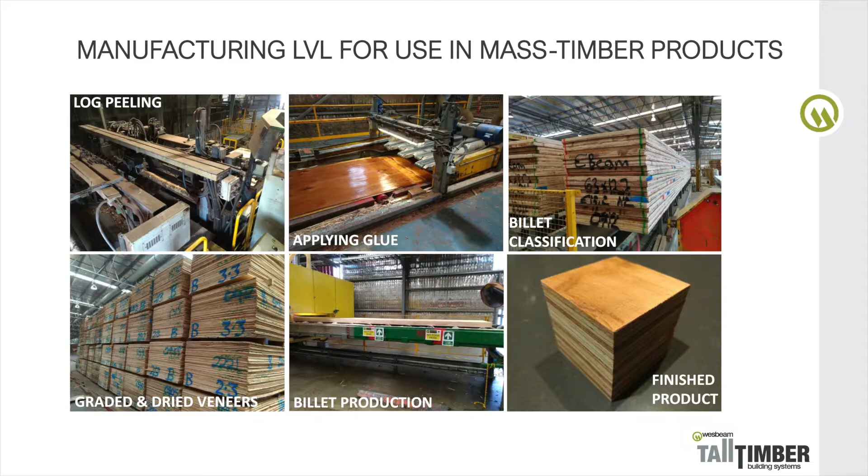So if the design determines that the column needs to be 600 by 400 millimetres, for example, then you can build up layers of LVL. And because it's being made in this plate format, you can then increase some sections of that build up to higher lengths than the other and create the opportunity to have a mortise and tenon, if you like, junction, which allows and speaks to how you can start to connect these buildings. So having the elements is one thing, but having the connections is another.

You can make a mass floor out of LVL, and this is where you block laminate LVL together, and you can in turn also block laminate other materials. And at the moment I'm working with another company here in Australia to look at block laminating CLT and LVL together to get even a longer span than some of the ones that Greg was talking about. And we're talking 9+ metres in a mass floor at the moment.

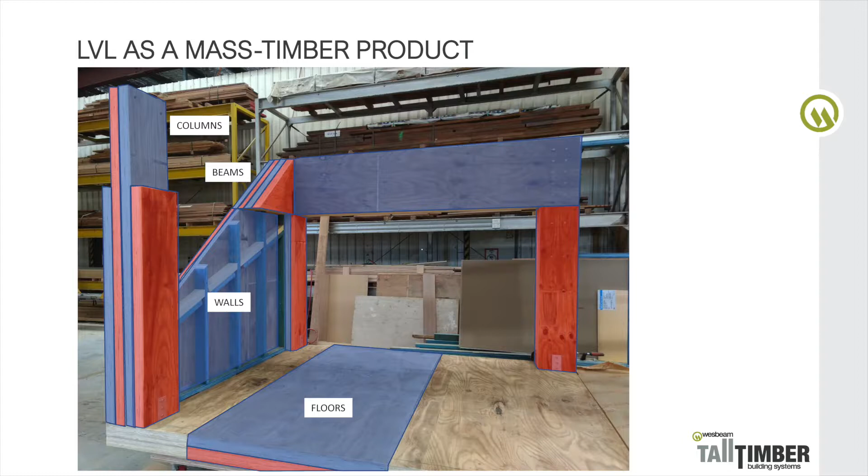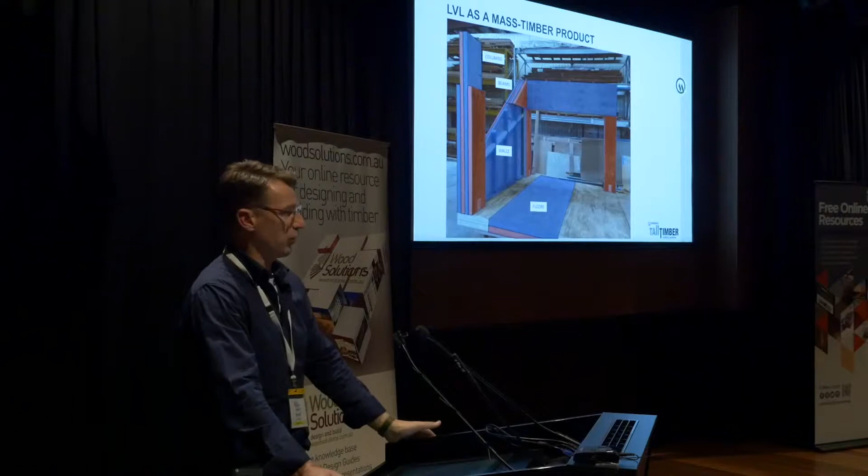And of course you can make a mass wall out of LVL as well if you want to. In this instance, it's actually a hybrid mass and light frame wall, which could be used as a dividing wall for acoustic purposes. But this is a part of the journey that we're on at the moment to start to help educate the market about what's possible to make LVL, in this case, into mass elements.

So, this is the family of elements that I've been developing, if you like, codifying for Wesbeam to share with the industry at large. These elements we don't make, so let's get that out front right now. Wesbeam makes LVL and we bring a lot of smarts to the discussion. These elements are for further up the food chain or up the supply chain, which we like to think that we can partner with and assist with.

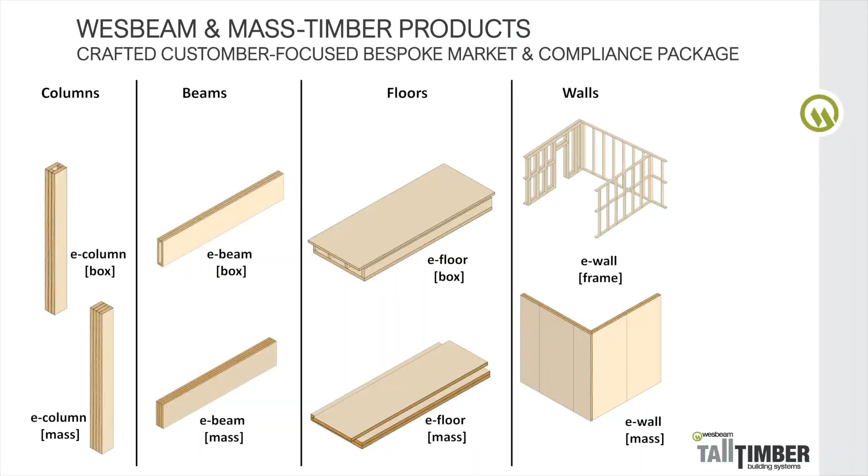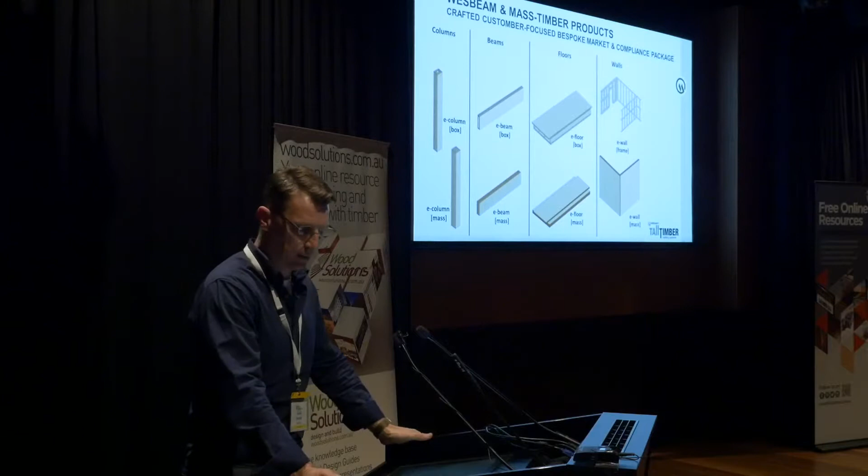So of course we've got all the standard things that we've been hearing about earlier today. Columns, beams, floors and walls. All of them can become mass elements. So let's look through some of the column options. In this case, a box. So this is just a snapshot of a document that we will be releasing later on in the year, talking about typical sizes.

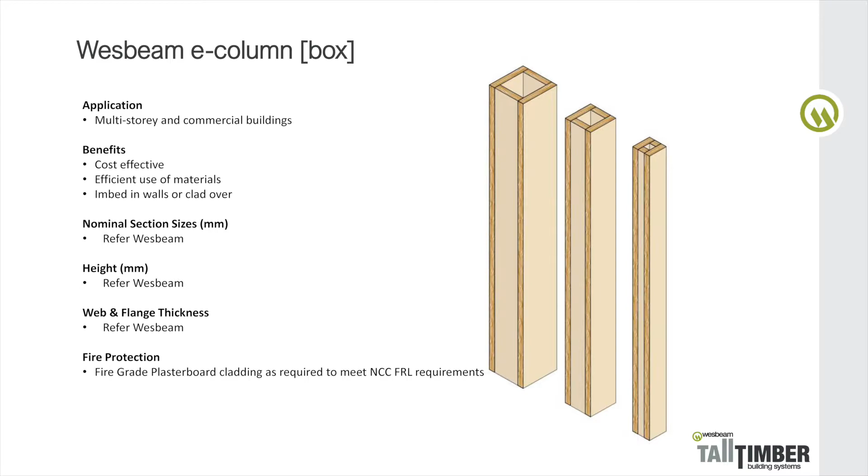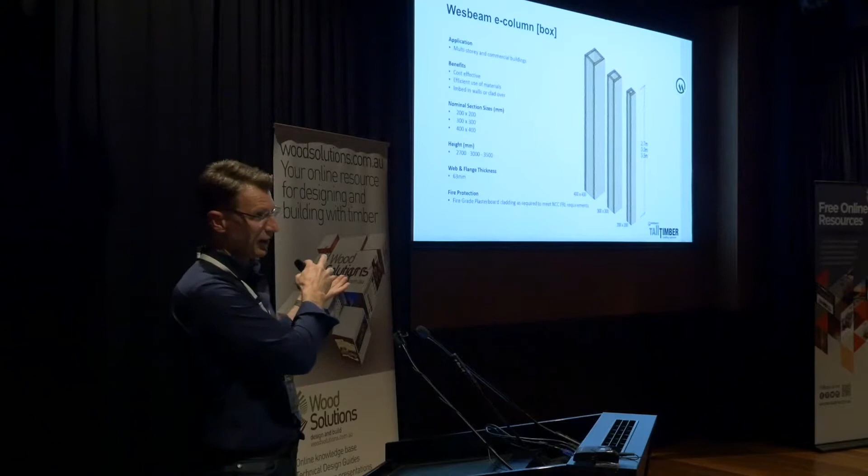Now, I believe that there are two areas that the industry at large needs to be aware of. There's the commodification of standardised formats, and then there is the bespoke elements. Now, the fabricating sector in this country, I think, has got a long journey in front of it, but an incredibly bright journey, because some amazing examples out of Europe are showing us the way. But it's the fabricating sector that's going to start taking products like these and applying them to buildings.

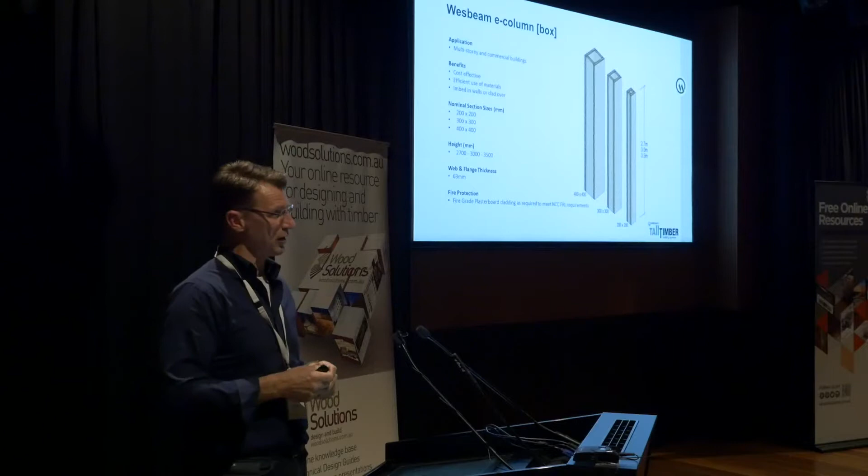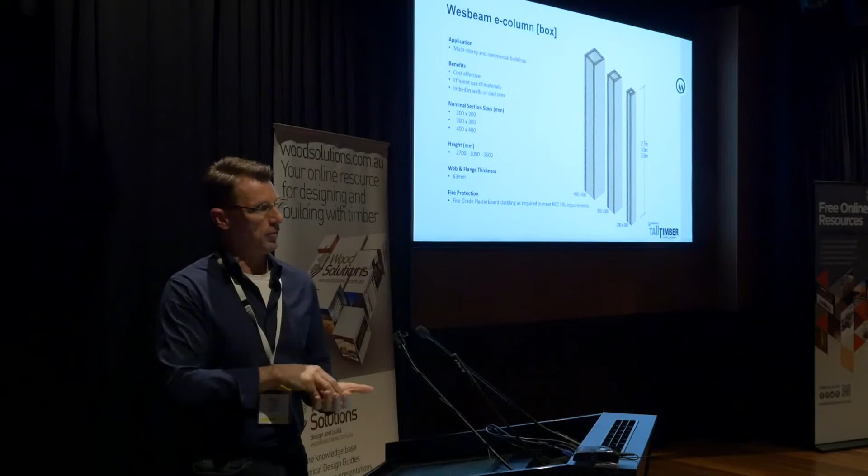Now, I believe if you take a standardised building, say an office building with a 9x9 grid, typically you're going to have pretty common column sizes, pretty common beam sizes. I think every time that somebody wants one of those, they should be able to go to a guidebook or go to the internet, find out who's manufacturing those, what the order of magnitude of cost is, what the performance is going to be, and choose which one of those they're going to select. We shouldn't have to make that from scratch every time.

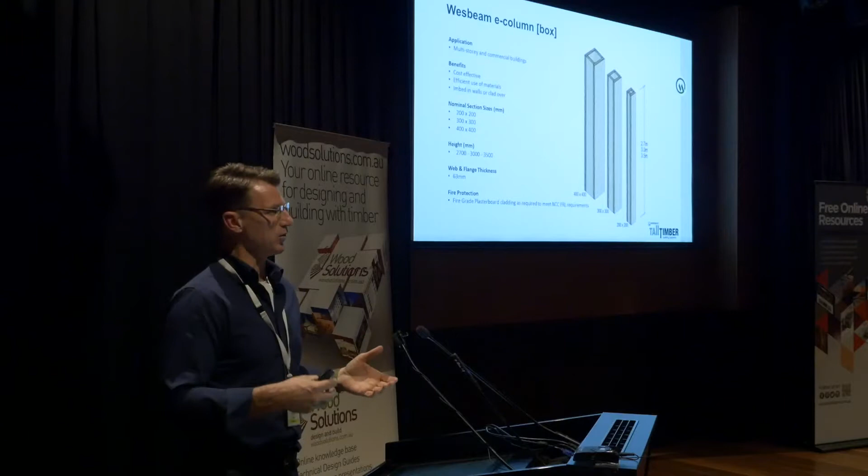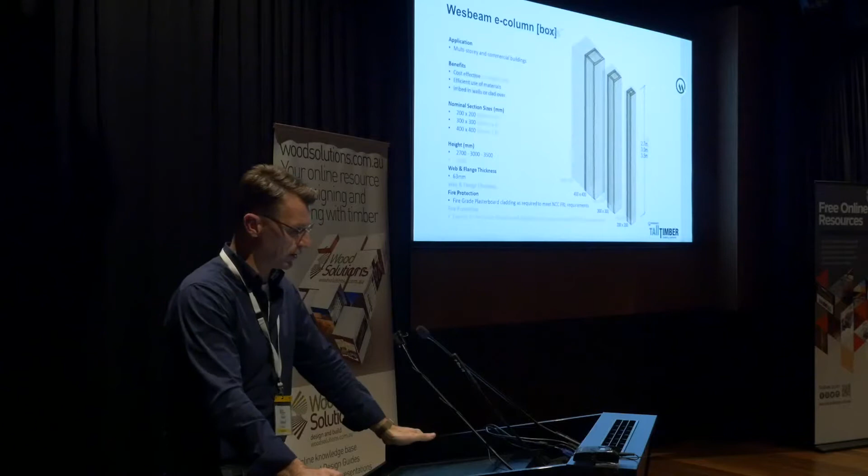So these are about providing a range of standardised sizes. You can effectively say, I've taken some of the ideas that we worked through on this guide in my early days at UTAS and am now trying to apply them in this situation. Similarly with the mass column, you can block laminate the elements up to make a larger section in a range of sizes and lengths.

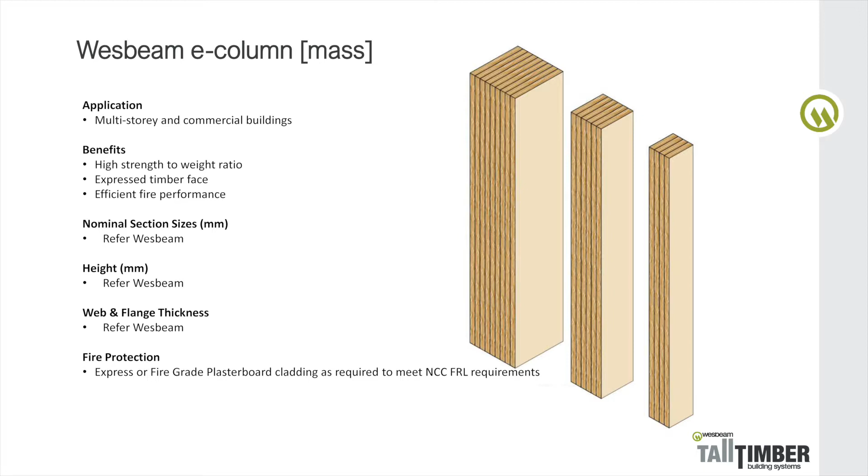Now, I'm not saying these are the lengths that typically are being manufactured, because Wesbeam's perspective is not about us moving into the prefabrication space. It's about empowering the next sector up in the industry to be able to do this and partnering with them. We're coming up with this sort of term that we're calling the compliance package. And each compliance package is going to be different depending on who you're working with.

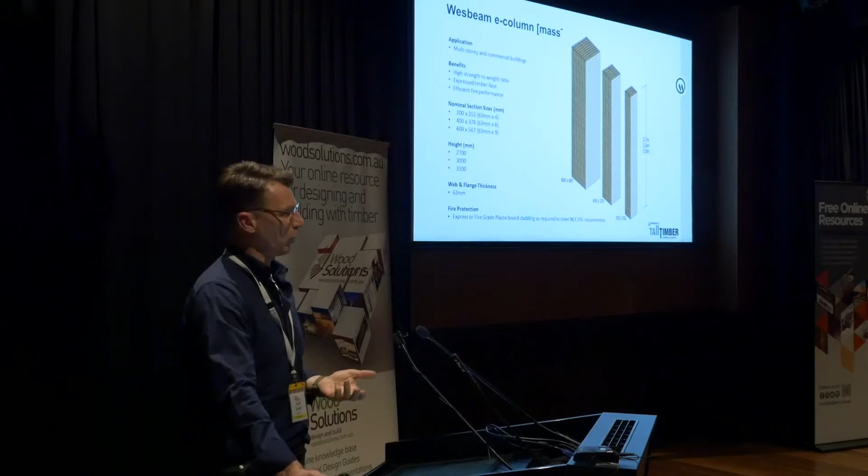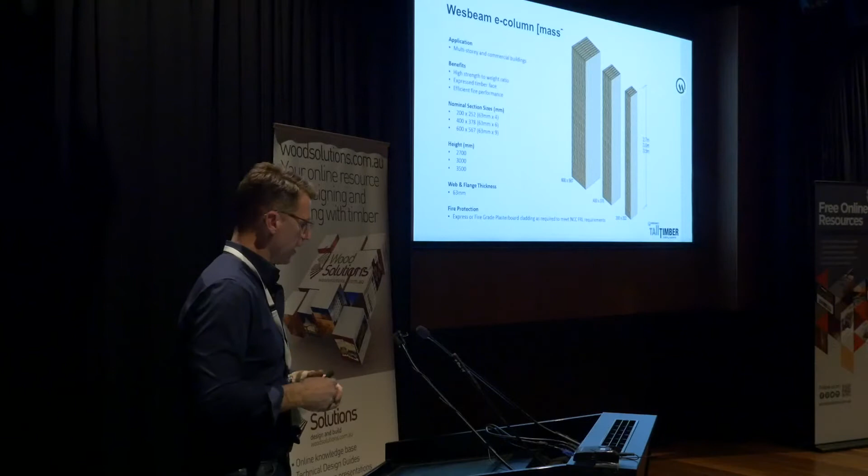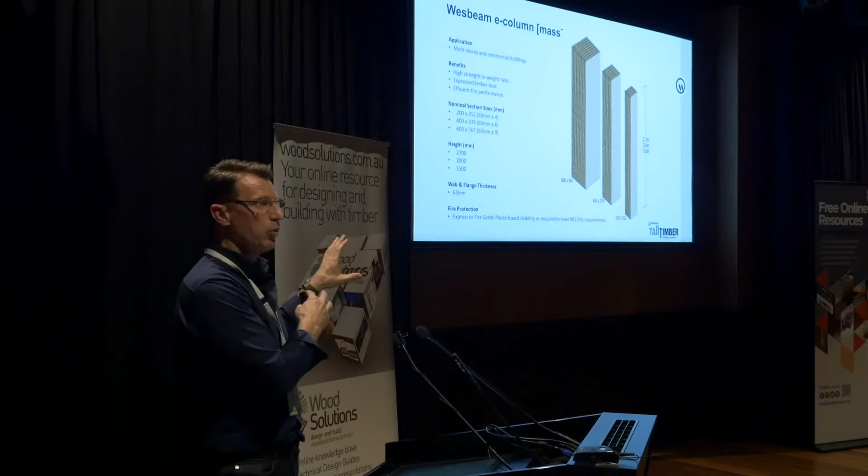So these standardised formats I'm talking about here, my role is to work with individual prefabricators and builders, if they're looking to move down the supply chain, to be able to develop a bespoke compliance package according to what their aspirations are, what their market is. So the standardised sizes you see here are just examples. They will vary depending on what people want to make and what market they want to make them for.

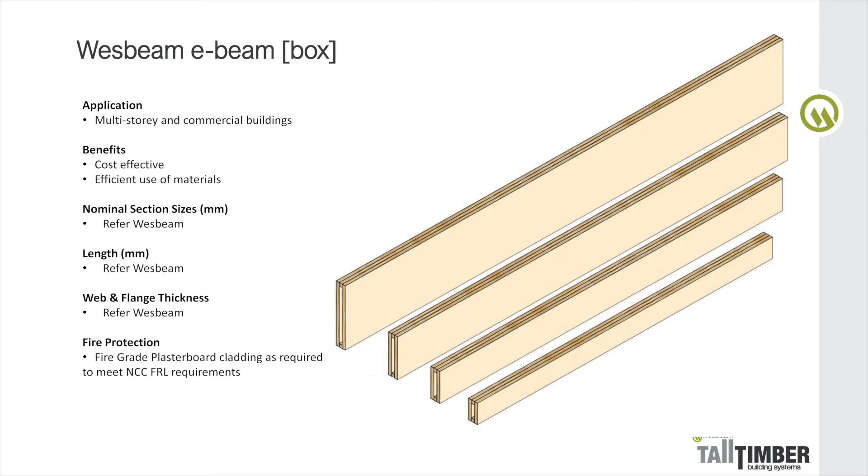The same applies from columns straight across into boxes. Those box formats are typical lengths I think the market would be able to use, into the mass beam sections as well. You can see a range of sizes on there, which the market may choose to adopt. Floors, you can have a box section, which is being known as a cassette floor, or you can go to a mass section, and each of those are going to have their sweet spots, if you like, about where to apply them.

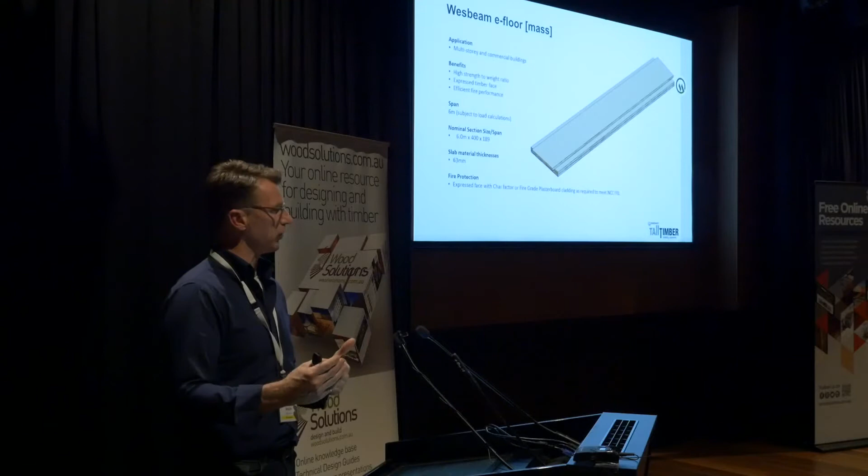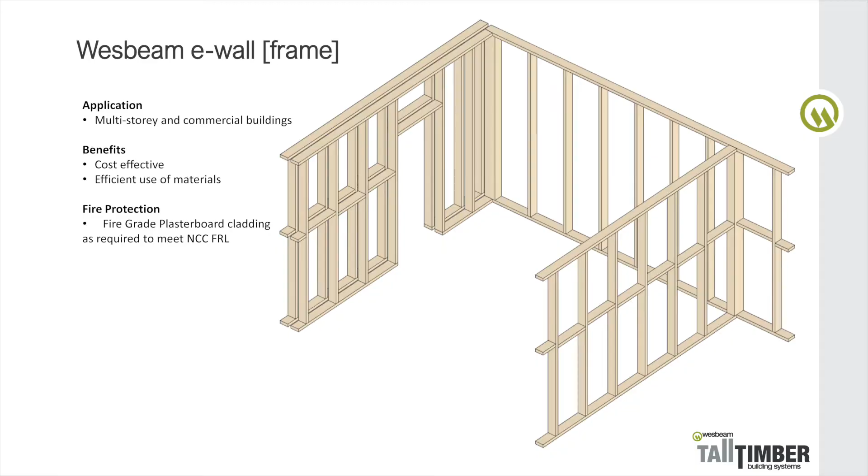Frames, nothing new here. People have been making frames for a long time now, but I think it's an important conversation to have, because it's not just about mass sections. Mass sections may be used for a particular building application, but frames are still going to be involved, because we still need to divide those spaces up. They may be structural, they may not. The design team are going to be part of that, determining what's efficient.

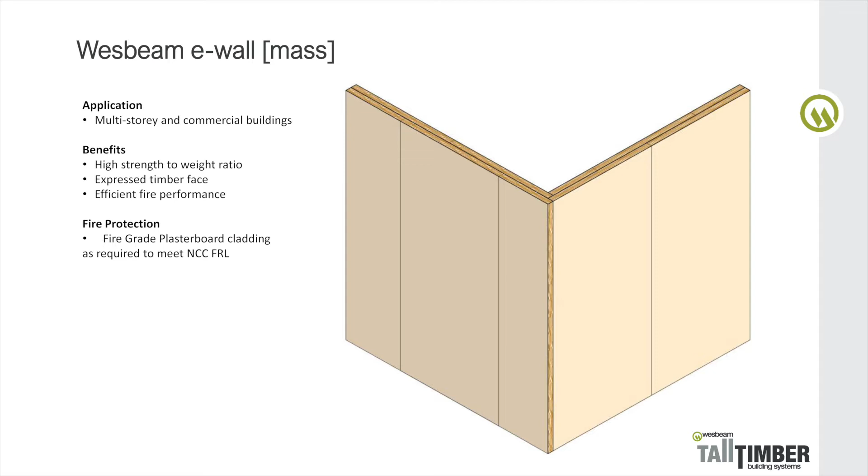And of course, you can have them as mass walls as well. You can actually rotate your billet, your E-slab as we call it, on its edge, and it can take load straight down the grains in its strongest axis.

You saw this picture a little bit earlier on. About a month ago, I was on a WoodSolutions tour to Europe, and I visited this building that we saw the pictures of before. And there we have, in this case, beech LVL columns and beams, prefabricated, and doing a fantastic job. And in my opinion, they look fantastic.

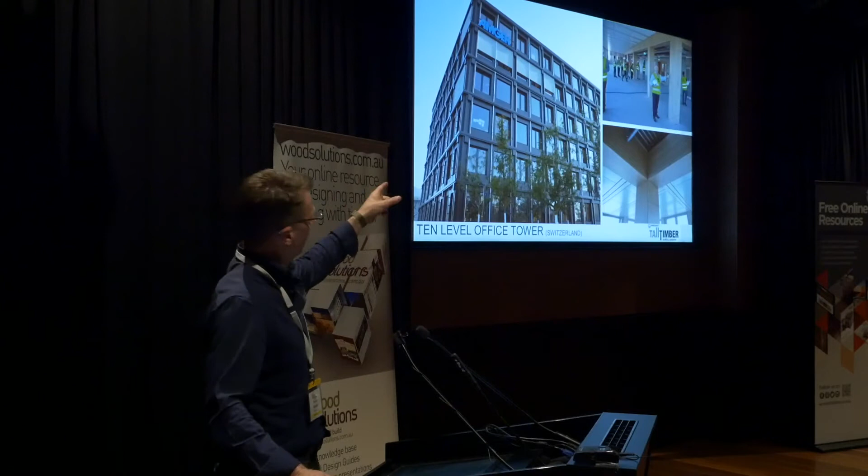Just out of interest, if anybody recognises that chap touching the wall, that's Tony. Tony's the factory manager at XLAM. So that gives you an idea about where Wesbeam and XLAM are looking to go into the future, where we've got complementary products, not competing products, that can build up what the market itself is likely to need.

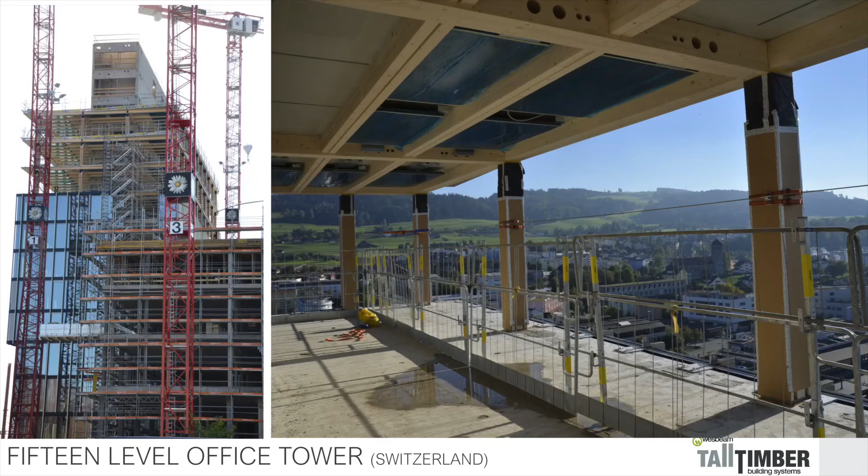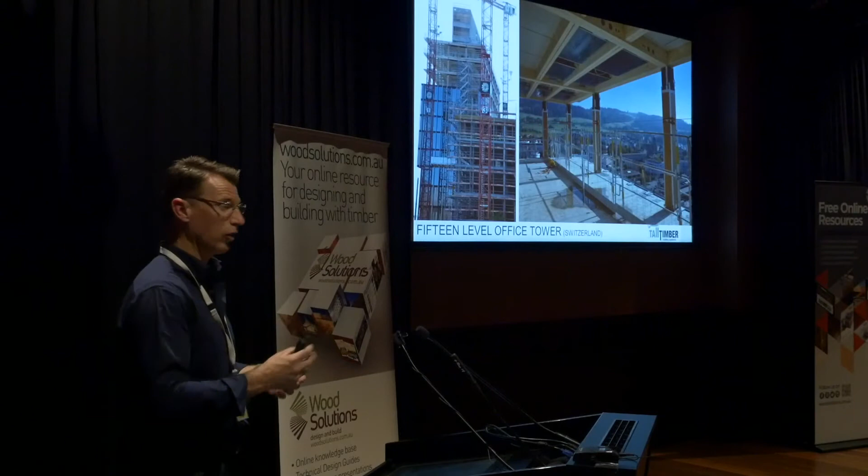The 15 storey, Christoph mentioned earlier on, this is it. This was literally taken 3 or 4 weeks ago. So this here is a concrete building which is going up next to the prefabricated timber concrete hybrid. They both started around the same time. So this gives you a rough order of magnitude about the speed that is being developed in a more established prefabricated timber, mass timber context.

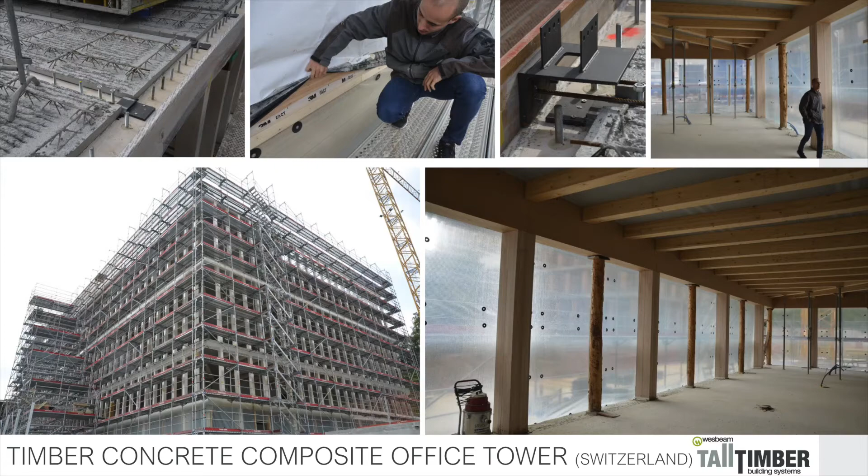This particular project, and you might recognise that chap there, Christoph and Gregory, is actually a graduate of your university. He came over to Tasmania, did, what was it actually he was doing? Something with rotary peeling, yep. He is now the project manager for this building, which is being built in Switzerland, and he's demonstrating to me some of the elements that have gone into this project.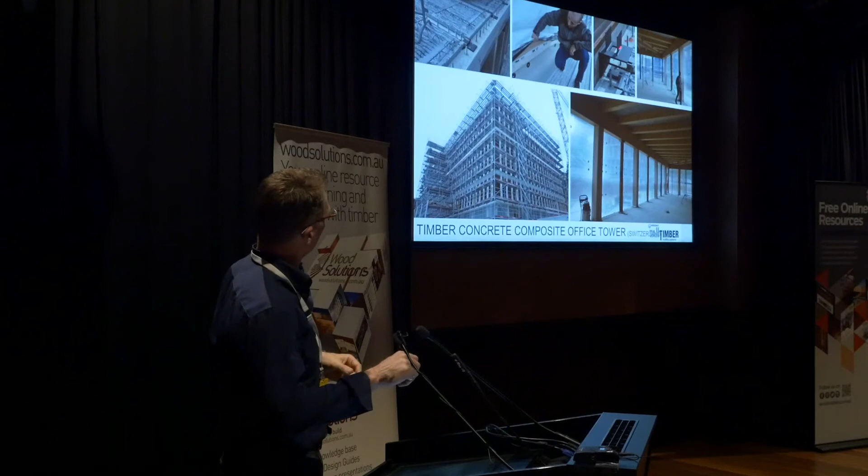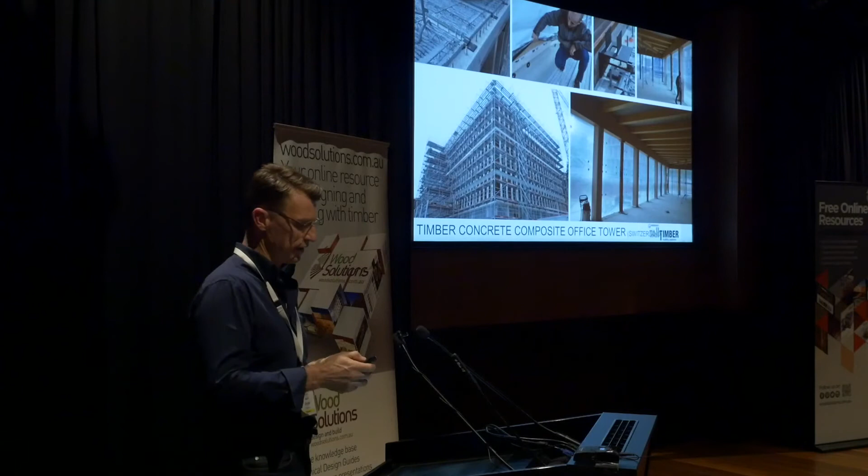LVL columns and beams, in this case beech LVL columns and beams, and that project has got 2 more levels to be completed. But if you have a look at this image here, I'm not really game to press this button. Oh, there we go, I've got it. That there is a plate which connects up on each level, which allows them to make micro adjustments to the height of the building in case there's been any settling or creeping through the process. So they're getting really smart with the way they build these structures, and this is an off-the-shelf product, I believe. So that gives you an idea about some of the possibilities in mass timber.

So this is an ongoing discussion, and it's a broad-based discussion. At the end of the day, we're all in this together, I believe. It's not actually me against you or product against product. It's about finding the correct solution and mapping a pathway with our colleagues. That's my last slide.